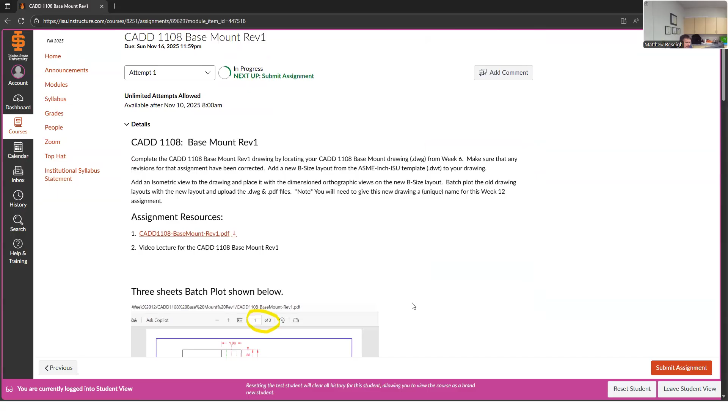Base mount, you've already drawn the base mount, but it goes back to week 6. So I'm going to open this real quick and just preview this, give yourself a little time to find this stuff. So base mount Rev 1 is going to be a revision from this base mount drawing that looks like this. This drawing was an assignment from week 6 that I gave you the model and you guys dimensioned it. Then we went over it, and I probably graded this already and gave you back the feedback. Some people fixed their drawings pretty quickly and re-uploaded them after we went over the key. The key's posted for it.

So essentially what it requires on your end is to get back in this drawing and make sure that it's correct. And it would look like this. It could look a number of different ways. You would really want to go back to your week 6 feedback for this base mount drawing and open it back up and make sure that you've made the corrections, or just review the revisions that I gave you, because you're going to use it as your base for this. What we're going to do is add the isometric view of this.

So not only are we adding the isometric view, but we're also adding the new template that is the ISU template. Because when we drew this, we were on our own title block template. We're going to bring your drawing into the ISU template, which doesn't mean you have to redraw this whatsoever. I mean, if you've lost it, yes, you're going to have to redraw it. It's not a crazy complicated one, but if you have it, it would be best to work with what you have and bring it in.

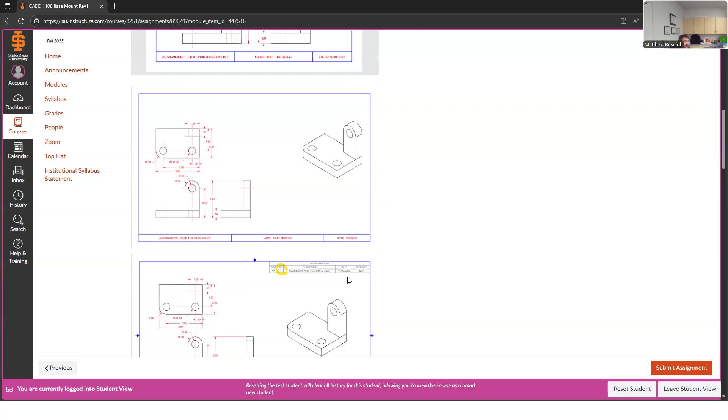So in order to get ready for tomorrow, I would want you to find this assignment and at least take care of the red lines for the dimensioning and then have it saved and ready to go. I'm just gonna show you a few little things on how to bring the ISU template into that drawing, put everything on the ISU title block page, draw the isometric view of it, and then put that in the drawing as well. And then I'm going to do a batch plot, which is just when you have multiple sheets in a drawing.

We haven't done this much, maybe, and the architectural students may have done this a lot because a lot of their drawings were just batch plotted PDFs, I'm thinking. But if you have multiple drawing sheets, how to print them off so they're in one PDF is what we'd want to do. So this assignment incorporates drawing a 3D-looking object in 2D. It also has doing a revision from one drawing to the next, to bring it up to date. And then it has an element of knowing how to do batch plots on the printing.

So it's a little bit of a technical aspect and drawing aspect, but maybe just what I feel like is it's a little bit of drawing management and then actually doing some of the new drawing. So we'll probably start this second half of class tomorrow. So in the meantime, find this thing. It's from week 6 for sure.

My files are organized by weeks. You choose to organize however you want. But in my course, I have mine all organized by week. So if I went to week 6, knowing that's a week 6, it's this base mount is where I have mine. And then my ortho key, this is what yours should end up looking like once it was done. And so this is the drawing you'd want to find, which has where I drew this.

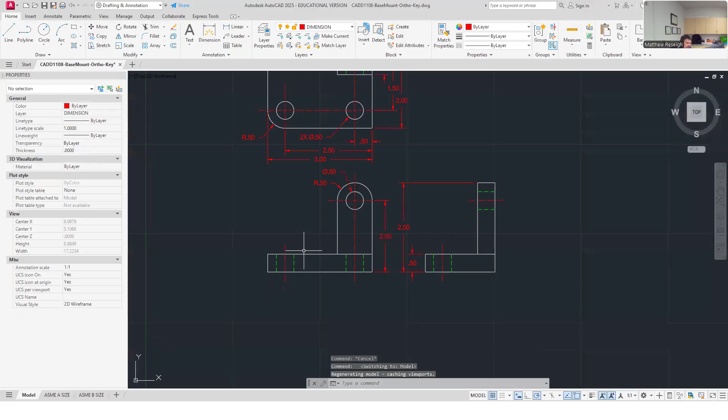And really, it was a drawing that you downloaded from Canvas because you added the dimensions to it, and then you re-uploaded it. So obviously the original drawing still lives in the week 6 assignment. You could pull it, it's just not dimensioned, and then you could dimension it. So there's ways to get back to square one by tomorrow, but this is where you'd want to be because I'm just going to go in here and add the isometric to it.

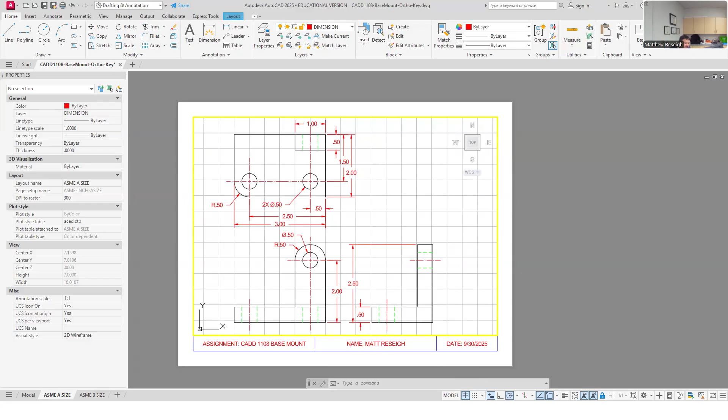And then mine, probably like yours, my template had both sheets. I think when I did the assignment, I turned it in probably on an A size sheet because it looks like I've strategically placed this thing to fit on an A size sheet at a 1-to-1 scale. I have the B size sheet, but I don't think I used it. I put it in the layout, but it's also at a 1-to-1 scale.

But we're going to bring in, yeah, I'll show you tomorrow how to bring that in and bring in the new template just from this file. I'll probably save it as a new file. It'll become a Rev 1 of this drawing. So we're just going to try to bring it in and finish this drawing. So that's my plan for tomorrow.

So look for that thing or redraw it if you have to, but I hope you don't have to redraw it. Okay. Because that's a matter of you keeping track of your own files, which is super important. So this is a lesson in that. If you have to redraw it, it's a lesson in I should keep track of my files better. So I have it.

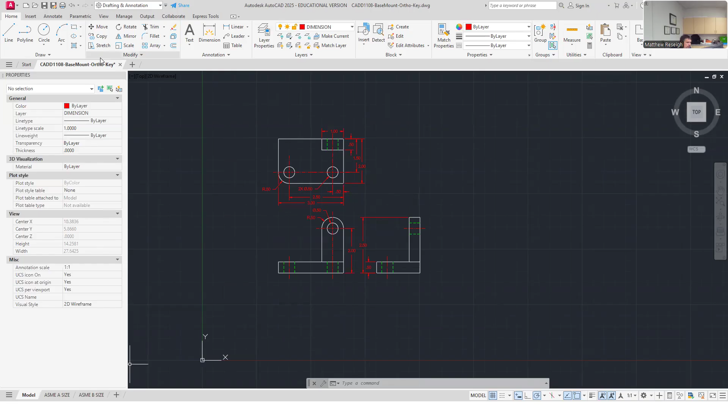Okay. And then you should have made the revisions to this. If you didn't dimension it quite right, and then I gave you feedback, you could pull up that feedback, or you could look at the key and get it dimensioned. Just notice maybe what you did differently than I did. Make sure things are sized and located right. Okay. So moving on from there, that'll be tomorrow. That's a preview of tomorrow. No charge.

Today, let's do this other assignment. So let me put that back out. The other two that we'll do this week, they're brand new drawings. So this is the only one that we have a revision going on this week, which I like. I'd like to do more of that kind of work, but I only have this one that I've modified to be that way. So right now we're going to jump into worksheet and Fastener Group 2, and I'll do it the same way I did Group 1. I'll work the worksheet and the drawing simultaneously. So I'm kind of working on both these assignments at the same time.

So the worksheet should just be a Word doc, probably a download. There's the doc there to download. So I'm going to open up mine. I should have a blank slate, that is, that's the key. I'm going to move that over here. Let's do the other one, this one. So worksheet 2 should look like this for Fastener Group 2.

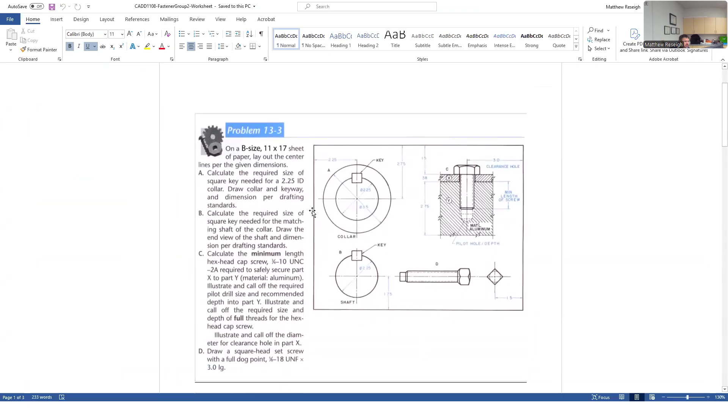Really, it's a key way. We're doing pretty simplified views in this, but there are kind of 4 different objects going on here, but I call it almost 3 different ones. We've got a hub, they call it a collar here, and a shaft. So this is kind of a hole and shaft relationship going on. And so there's some tolerancing that's going to go on here. So it has A is going to be,

yeah, let me read this. Calculate the required size of the square key needed for a 2¼ inch ID collar. So we have a 2¼ inch ID collar, or we'd call it a hub, maybe. I think in the appendix we need to solve for this, they might call it a hub.

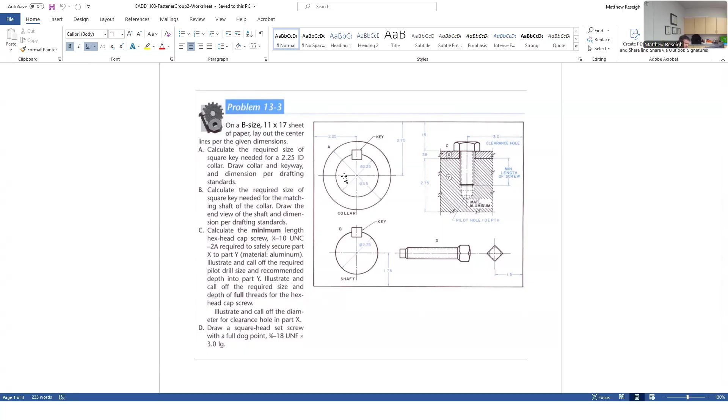Essentially, it's the hole for the shaft to fit into. And then we need to ASME standard dimension that. So we've got to kind of revisit that. We've done that one other time at least, maybe ratchet plate a couple times. Geneva Cam had some ASME. There was kind of the hub. And we dimensioned that key, the keyway in the hub, a pretty particular way for ASME standard.

We'll do that again. And then we need the other side of that, which is the shaft itself going into this hub, and calculate the required size of the square key needed to match the shaft for the collar or the hub. And we're just drawing simple front views of those.

We're not going to draw a right, even though we have no depth. We don't know how long the shaft is. We don't know how long the hub or collar is. That's okay. We're just going to do them as front views and how they fit together and the tolerances that would be associated with those in order to make them fit together. So that's kind of A and B. I consider that just one thing. They work together. So we'll do that one probably first.

Then C, we're going to have to do this where we take our fastener and we actually put it to work. So last week we just drew fasteners that weren't doing anything. We just drew the fasteners themselves. Here's one that's going to be in some work. It looks like we've got some aluminum we're going into, an X and a Y plate. So two different plates. Like I'm using this fastener likely to hold plate X in position in relation to this base Y, or whatever this is here. So we're going to do this ourselves here.

This is kind of the simplified view. The trick here is just thinking about how a fastener fits into a hole. This isn't a through hole. This is what we'd call a blind hole, meaning that in this particular part, maybe those threads had to be cut to accept our fastener. So internal threads were cut into this Y part, and so we'll get to that one.

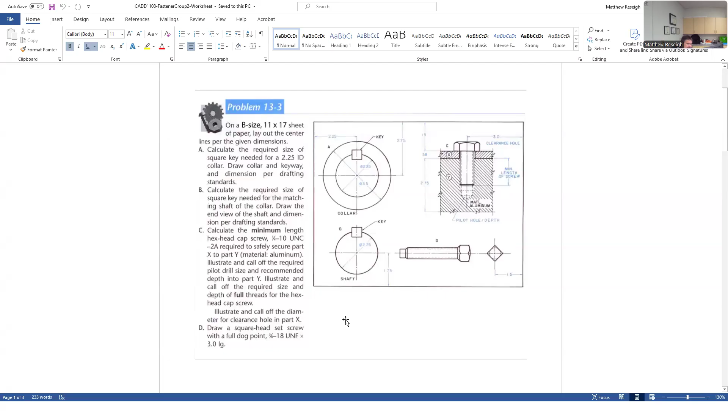And then we have this one that's just a little standalone. It could have been thrown on the other ones, but it's not. A little standalone set screw fastener. And so we'll talk about what that does and why it is the way it is when we get to that one. So I view this as kind of just three different things. I know there's four different things we're drawing, but okay.

And then they give us the local note for that set screw, a square head set screw with a full dog point, and they give us our local note, so we'll know how to maybe dimension that. But it's got some similarities to how we did that hex head in a way. So yeah.

What? Oh, so here's my. This is my. Oh yeah, I think. Yeah, got it. Okay.

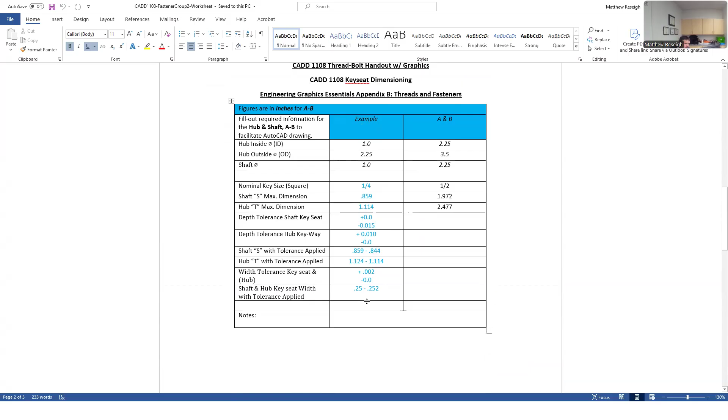So my worksheet starts with an example that's been done, and so I'll walk through the example and how to use the worksheet, and then we'll do that for our actual size one. So I think I preloaded the sizing from the A and B question here.

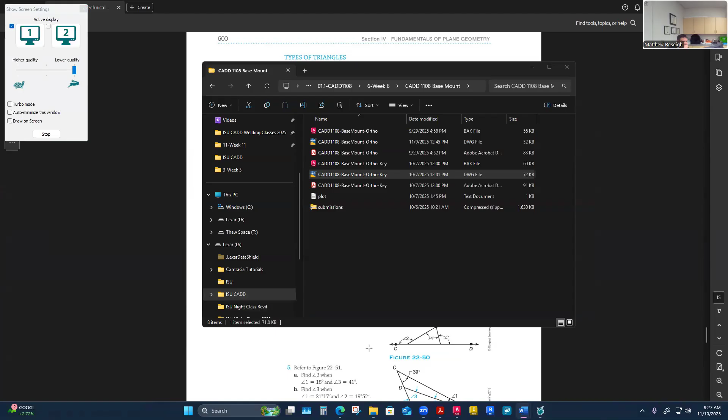I sure can. Let's do that. Thanks for asking. I forget that sometimes. And it's buried here somewhere, right there. Got it. Back up. Go back to my worksheet that's up here, right? I think it's this one.

Yeah, so what it says here is that in order to do this Fastener Group 2 worksheet, I need to find the thread bolt handout with graphics, okay? That one I pulled up, I don't think this one is critical to pull up, but we can look. It's in here. So this is the assignment.

We're gonna fill out this worksheet. Let me go back out to the main hub of the assignment for week 11 here. Remember, I loaded a bunch of resources into the resources for this week just because they kind of apply to different assignments. So let me open this up. These are going to be where I should find the handouts that it's directing me towards.

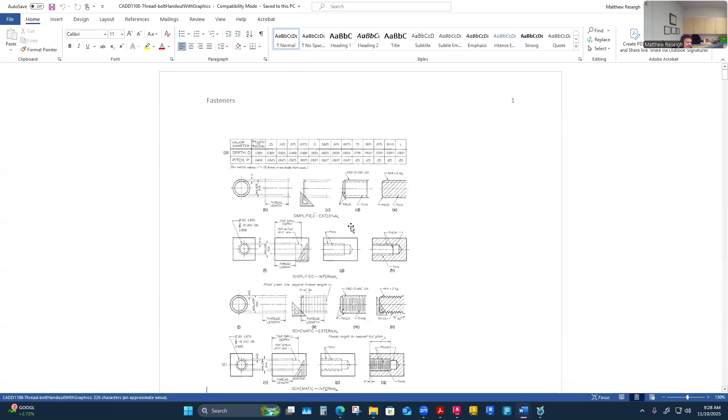So the first one it said is the thread bolt handouts. I'll open this up. I have my copy on my thumb drive here. Let me find it. Week 11. Thread bolt handouts with graphics. It looks like this. I don't think we need this too much for this particular one. These were some instructional sheets on how to draw this. So I know I allude that I need this.

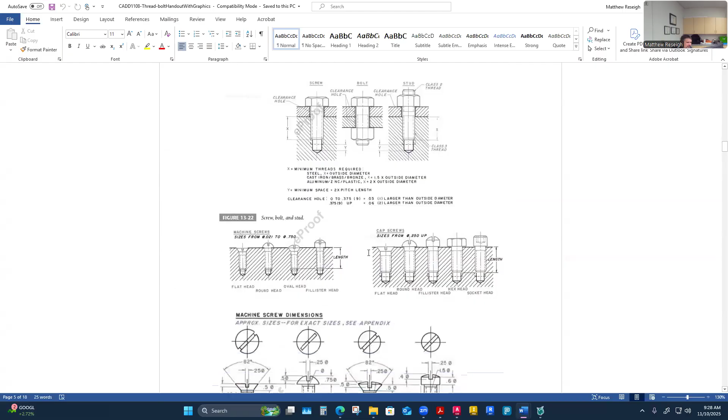But I probably need this when it comes closer to doing problem C of the group, and maybe the dog point a little bit is captured on here too. I think it probably is, but I think it's in Appendix B as well. So I think the necessary stuff that I need is probably pulled in onto Appendix B. So this one I may or may not need, even though it says the thread bolt handout with graphics. That's what I just pulled up. But I do need this one, key seat dimensioning, and the Appendix B.

So I think that I call this key seat dimensioning. Let me look in the resources tab. Key seat dimensioning handout. So we haven't used this last week. This will be the first time using this particular resource, this PDF. So I have it as my key seat dimensioning resource. This PDF, I'll open it up. It looks like this. First page is just a bunch of instructions. It's actually the instructions on how I filled out my example on that worksheet. I'm following these instructional sheets.

So how to obtain the proper dimensions for a key seat. What we're actually referencing when we do this is the Machinery's Handbook. This is the machinist Bible. That is this huge, thick thing that has a lot of stuff in it, machining related. There are some sections of it for key seats, shaft, and keyway combinations. So even if we had called out what's going on here on our print, the machinist is probably going to go and double check your work as a drafter and as an engineer ahead of you. The machinist is probably going to go back and make sure that the print that you're providing them makes sense to their own

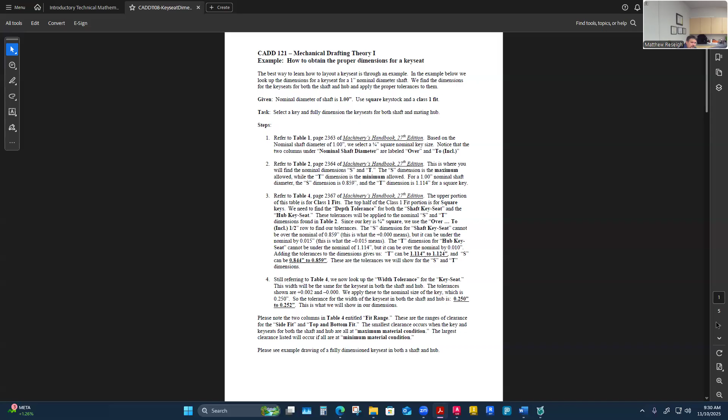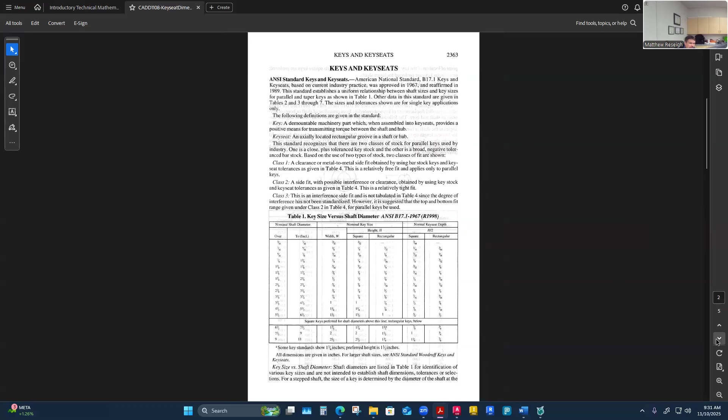Machinery's Handbook. And I don't know when the 27th edition came out, but that's what this is saying. We have some excerpts from it. So if I scroll down to the next page, page 2, these are excerpts from this Bible. And I do think this is page number. So this would be on page 2363. So it's a fairly all inclusive volume of mechanical stuff. 2364. Yeah, so we're pretty deep into the Machinery's Handbook. It is a thick volume of information. So these are just some particular ones that have been pulled out for keys and key seats.

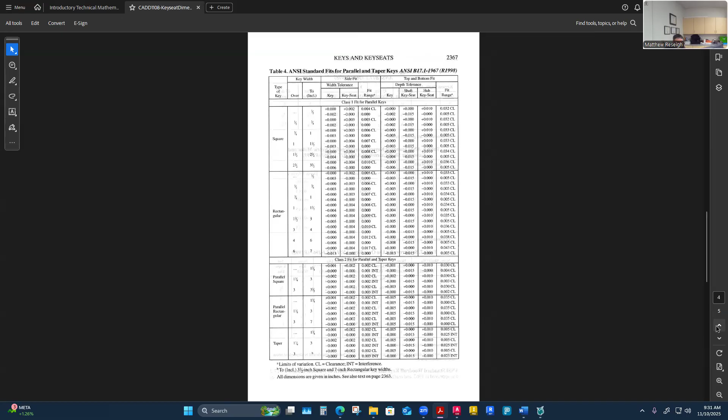So this is like a little bit of a research project, and then we're gonna end up with a drawing that somewhat looks like this, only I'm gonna put it on my ISU template. So it's not gonna look like this anymore. I think this last page was maybe how it used to finish off, but we're gonna bring it into the ISU template. I will come back and check to make sure I dimension mine the same way, but I'm not going to use this as my go-to dimensioning yet. I don't know if I've posted imagery for this yet. I should look.

So what I've got open is my key seat dimensioning handout. I don't really think I'm going to need to use the thread terms handouts, but I do have it open in case. And I'll need Appendix B when I get to some other stuff, but not for these first couple, especially for the first hub and shaft that I'm going to do. So I'm going to bounce back out to the main page. I've got the worksheet up. I've got to look through it and understand how to use it, but I'm going to go to the drawing, and let's see what I posted up for the drawing here. I thought I posted some imagery of what it looks like. So we're going to use our ASME inch template.

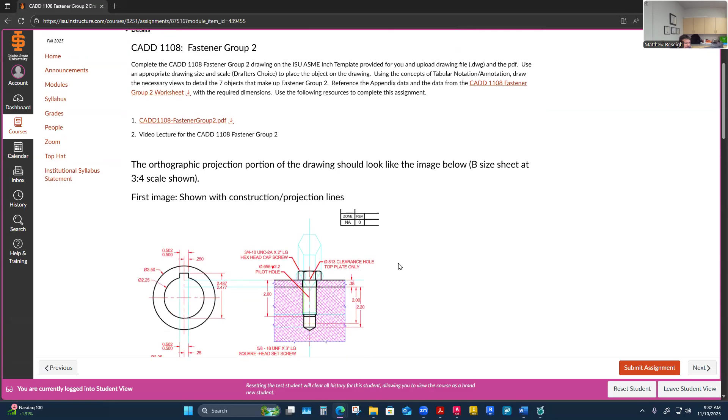We'll figure out which scale, which sheet it fits on the best. We'll probably tabular notate this potentially, or I'd say use the concepts of tabular annotation, which is how I built a table for worksheet or group 1. I don't think I built a table for this one though, so this is maybe a little misleading. I don't have to do it tabular. I do mine as more of a local note scenario here. So I didn't build a table. I use local notes to call out the fasteners, their thread notes, and so this is also a simplified way.

A table's great when I have a lot going on and I have a lot of different fasteners, and maybe they're always better captured in a table. This is a case where I just have a couple of fasteners, and so the direction I'm headed for my drawing is to fit them all on one. They don't all have to fit in the same viewport, so I can do different viewports of them, but I'm going to try to fit them all, and they don't have to be arranged this way on my drawing either. However I can fit them is going to be great.

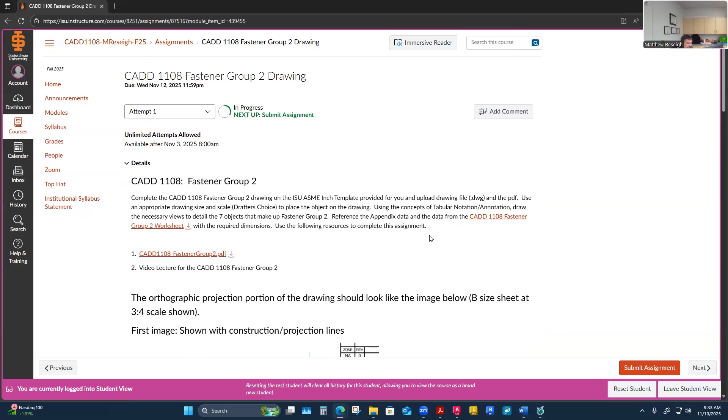Probably a B size sheet will be the most beneficial. So I'll probably draw them with enough. I can't remember if I had them in one viewport or not, but this is kind of where we're headed. So, it doesn't really tell me, just that I'm going to have to use that Fastener Group 2 worksheet and have it filled out to even be able to draw. So let's start filling that thing out. Okay.

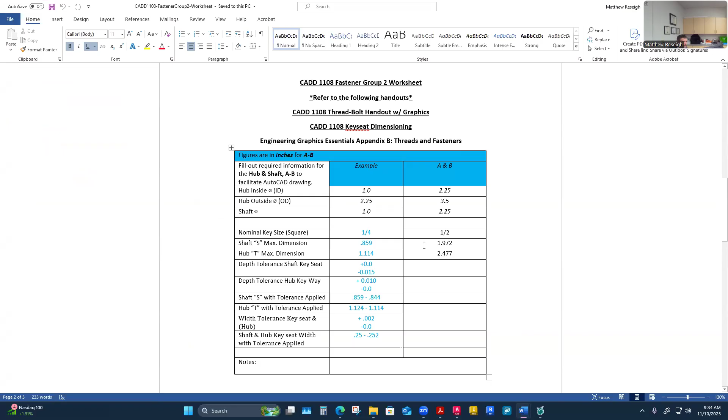Love these worksheets. Love them. Let's just look through how I got the answers for example 1. And so I might split screen this with my handout, which is this one: the machinery keyway dimensioning PDF. So I'll just kind of look over this with you here a little bit. They just use a 1-inch nominal diameter shaft. So the first thing they say is we're just going to do an example with a 1-inch nominal diameter shaft. So that's why I've put the hub inside ID as 1 inch here.

We're going to find the dimensions for the key seats for both the shaft and the hub, like a keyway or a key seat. The key seat might be the correct term for the one in the shaft. It's like the seat. You might make a little area of the shaft to accept a key. The keyway is, I think, the more correct term for the hub, or what they call the collar. So that's a keyway and a key seat, but they're kind of interchangeable. I think of keyway as being both of them, but technically in the shaft, it's a key seat. Okay. 1 inch is given. Use a square key stock and a class one fit.

Okay. So we've talked about different classifications. This is alluding to there being different classifications for the way keyways and key seats fit together with their keys. Because it really is a three-part combination going on. Not only do we have the keyway and the key seat, but we also have the key itself that's going to fit in and lock these three pieces together. So in the finished drawing, I don't draw the key itself though, right? I just have the key seat and I have the keyway, but I really am not drawing the key, but it would be the third component to this whole assembly.

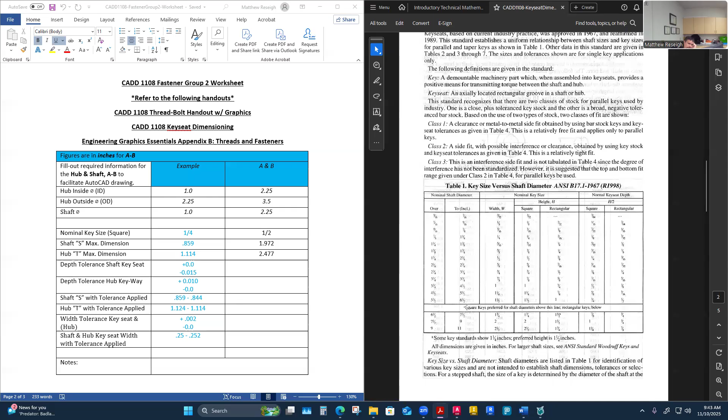So let's look at table two. Table two looks like this. Key and key seats. And I think this is just leftover literature from this page here. Key size, shaft diameters. They've got a lot of instructions here. It's probably good information. I'm just going to look at pictures here. Go down to table two. Here it shows me S. Okay, S is kind of the seat depth, and it's likely a dimension that ASME likes; they like their key seats dimensioned that way. Let me double check that real quick on my example here.

Snap back out to my little cheat sheet here. Let's see, yeah, see, I've used an S dimension there. It's this key seat dimension. ASME likes this. Mine's toleranced because there probably is a variance that this can be. And I think the T dimension is this one. And ASME likes us to dimension our keyways this way. So let's go back to this.

So S and T are going to end up being finished dimensions for sure on my drawing. It's driven also by the nominal shaft diameter. So in the example, it's 1. And then of course it's breaking down columns of whether these are square or rectangular keys and whether I'm talking about shafts, hubs, or tapered hubs.

So I believe ours is a parallel hub. That just means that the hole through, because I have no depth given on my example. If it's a taper hub, there would be some tapering to that depth actually, and it would fall into kind of a different category for sure on the hub. It would definitely impact that.

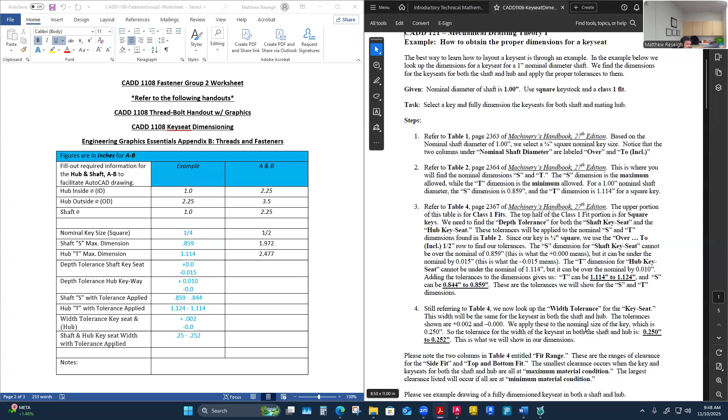And I'll be able to get a range of what my S and T dimensions can be, and that'll allow me to build a dimension style when I go to dimension that'll cover that. So let's see how we do that. Let's go back here. I think we're only on step 3, right? And then step 4, we might come back. Yeah, so let's go to step 3, table 4. You guys love these sheets, I know. Hopefully there's a table 4.

Right there. Table 4. So it's really driven by that leftmost column, which is the type of key. Ours is square. And like they said, they've got 2 different tables. They kind of split them here. One is for a class 1 fit, and these other ones are class 2 fits, which are really a tighter tolerance, almost on the verge of interference type fits.

So we're looking for a class 1 fit, square. And this is the key width though. So I have to know my key width. I'm not driven by shaft. Don't go to the 1 inch here. Go to 1/4 inch. So I've got to find the range where my key fits here, right? So this is key width. This is over to including 1/2 inch. This would be over 1/2 inch key, including 3/4 key.

So mine actually fits on the first row. They almost start with like 0 to 1/2 inch is essentially what's going on here, but mine is a 1/4 inch. It fits in this row. So what I'm going to look at is what these class of fits are. We've got a side fit or a top and bottom fit. I can't remember what it said on ours here, but we've got key seat, fit range.

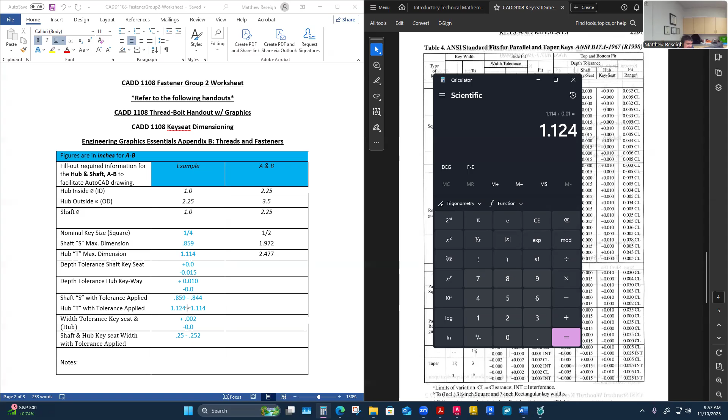So this is how I'm going to build my dimension for my actual. So when I see these, it's like, well, what are these? Well, these are actually the dimensions here. If I look at this little cheat sheet here, that's how I was able to come up with these dimensions, applying those tolerances essentially. Okay, we'll get to that point though. We just got to keep filling out our worksheet here and do our own row.

Great. So then the tolerance on key seat hub. Width tolerance. So the width tolerance is back to this row here on our 1/4 inch key. It says the width tolerance for the key or for the hub, which is not real clear here, because I call it the key seat. Oh, I do call it key seat. Okay, great. The key seat in the hub is going to be this particular tolerance set, plus 2 thousandths, minus none.

If I apply that shaft and hub key seat width tolerance, it's a 1/4 inch, and I can add 2 thousandths to that. So it can be 1/4 inch to 0.252 for the shaft and hub key seat. Okay. That's confusing. Let's see if we can do it ourselves for our actual dimensions given. We just start with step 1 and the table 1 stuff, then step 2, table 2, and then step 3 would be table 4.

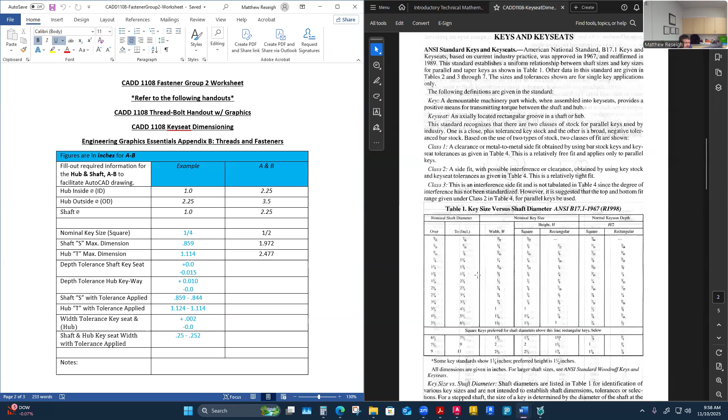Yes, I guess finishing the last 2 here is still referring to table 4. We now look up the width tolerance for the key seat. This width will be the same for the key seat in both the shaft and hub. That's why there's only one. It kind of applies to both shaft and hub on the width. And that's how we got those dimensions, was following that one particular column. Might be confusing on why we followed that one. We'll get to it.

Let's try to do one from scratch here. Okay. It looks like when I uploaded this, I didn't realize that I've already given you guys some answers. Probably, yeah, I already gave you guys half the answer. Half of it I've already done for you.

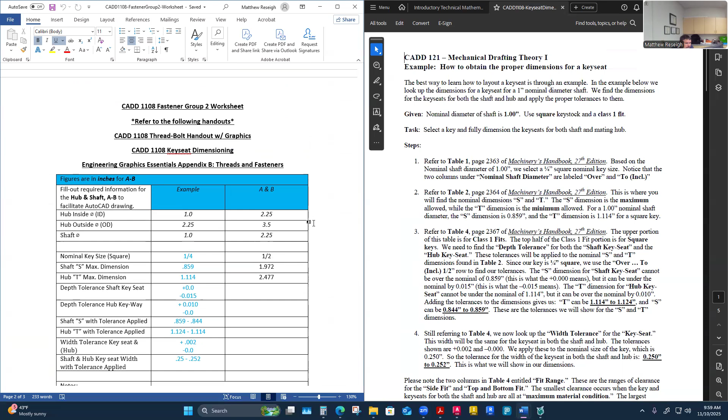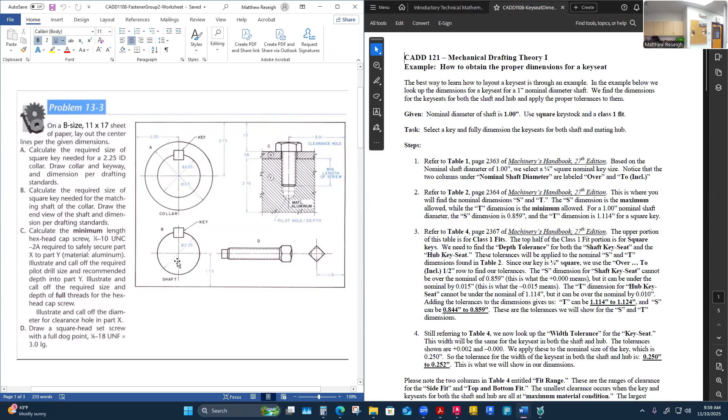That's good. So if I go to my example now, which is from the beginning here: calculate the required size for the square key needed for a 2 1/4 inch ID collar or hub. And then we're going to draw those, and then calculate the required size for the square key needed to match for the actual key seat here. So essentially, I'm working both these in A and B column here. So it's a 2 1/4 inch hub, or the shaft is going to be 2 1/4 inch. They're going to match as their nominal size, that is.

Okay. So I'm going to go down to my table one, and like I said, I've already done the first few answers. I'm going to double check my work here and make sure I did it right. So it says I need a half-inch key. Let's just make sure that's correct. And I should have deleted these, so you had to do it. But 2.25 is the shaft diameter. So this table one is driven by shaft diameter first.

So I need to find where 2.25 fits on here. That's 2 1/4. So 2 1/4 to 2 3/4. That's a row that might work. The only problem is 2 1/4 to 2 3/4 means that I have to be over 2 1/4 inch on my shaft size, and I'm not. My nominal size for my shaft is 2 1/4. So I'm not going to use this row. This has to be over 2 1/4. I'm going to use this row. This is including up to and including 2 1/4.

So this is my row to determine what my key size is for my square key, which is a half-inch. It's given right here. So that's how I've pulled the first data in. It's got a half-inch key. Great. And then what's the shaft S max dimension and the hub T max? All right, let's look at table two. I'm still driven by the shaft diameter here on this table. For a square, I'm looking for the S, which is the shaft max dimension it can be.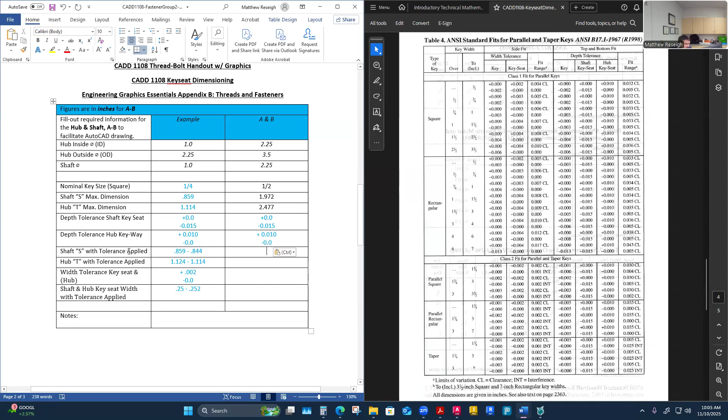It's plus 10 thousandths minus none. So it ends up being the same as the quarter-inch key. So I'm going to copy that and paste it over here. Perfect. And then I just got to apply. These will be different numbers, of course, because my nominal sizes are different. So now what I'm going to look at is the shaft S with the tolerance applied. So here is shaft S. I'm going to pull up my calculator here. This is just calculator work.

So the shaft, this depth that I'll allow it to vary is going to be minus none. Oh, sorry, plus none and minus 15 thousandths. So shaft S, let me clear this out and do my nominal size on my shaft, 1.972. And I just need to apply these tolerances. So really it says the shaft can be no bigger than this. So I'll start with that dimension there. If I apply the tolerance, that's plus none, so it's still going to say 1.972.

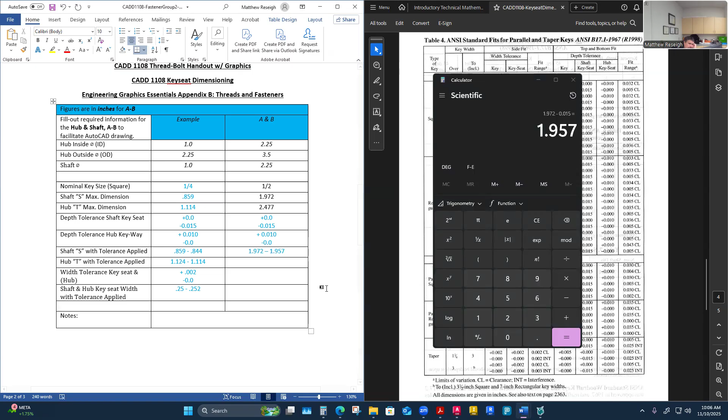And the range is going to be, this isn't a subtraction, this is a range. 1.972 to 15 thousandths under, right? So I'm going to take 1.972 and subtract 15 thousandths from it. This is going to give me a range for the shaft S, or the depth: 1.957 is my range for my shaft. What helps me think of that is this picture here. This is the shaft. That means the S dimension can't be any bigger.

I'm going to zoom in on this because I feel like this makes sense. If I'm going to put a key in here, the only dimension I've dealt with here is this depth dimension. I haven't even talked about the width yet, just the depth. So this S dimension in a shaft, this tolerance is telling me it cannot be any bigger than what's given, but it can be less than that, 15 thousandths, because I want to make room for the key. I wouldn't want it to be any bigger than that.

Otherwise, the key won't fit and the hub key shaft relationship will not fit. So I'm actually saying it can never be bigger than 1.972, but it could be smaller, which means this dimension would be 15 thousandths less.

And so really it would be cutting a deeper seat in, this is what it would be. I mean, it's kind of weird thinking. To me, it helps to look at that picture and be like, what is this? What does this tolerance even mean? It means that I have to make room for that key.

This dimension can never be bigger than 1.972, but it can be less than that by 15 thousandths. So my key will fit in there good. It'd be like cutting a deeper groove, deeper key seat in that shaft is what's going on there. Okay, cool. We'll look at the same thing with the hub, because the next thing is the hub with the tolerance applied. And so here's the hub nominal, 2.477.

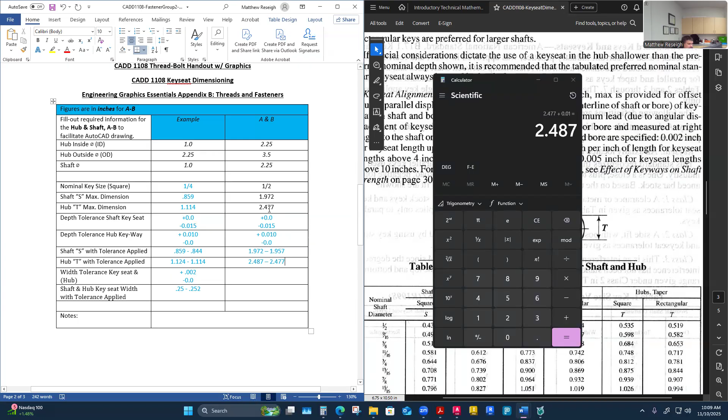Now, if I look at this picture to help me better understand that, and I look at this tolerance, it says that this T dimension can be bigger by 10 thousandths, which is me cutting a bigger keyway by 10 thousandths. But it can be no less than that. Otherwise, a half-inch key will not slide in.

So essentially, if I hit my S in its maximum material condition, and I hit my T at its maximum material condition, that'll be the tightest fit for that key. It'll almost be like size on size, like a half-inch can barely fit in there. It would still fit, but it might be kind of hard to get the key in there. It's going to be better if my machinist cuts this to allow some of that tolerance; they will know that it will fit in there better.

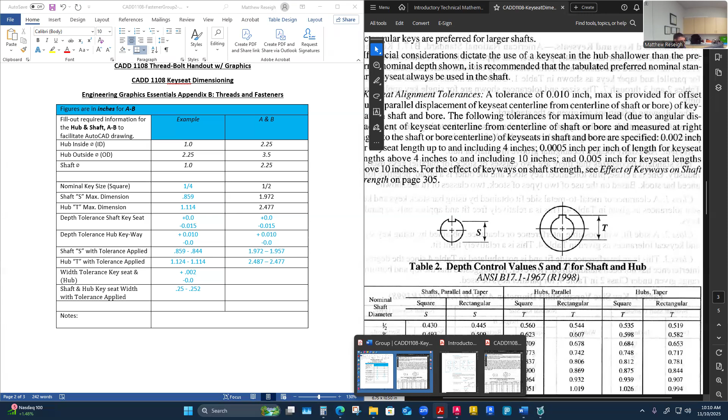So yeah, hopefully that makes sense. It's always confusing. Some people have had some experience with this stuff and it makes sense. Some people are like, what are we talking about? I get it. Be patient with yourself. We're about there with the dimensions we need, but we've only really talked about the depth. S and T are just the depths. On our chart, we've only been talking about that top and bottom fit, that depth. So really we need to calculate the width element.

The key has a width as well. It's a half-inch key, square, half-inch wide by half-inch high. So the width tolerance, this is for the key itself, this is for the key seat. I can apply this to the keyway and the key seat as one, because they don't really break that difference up. They call them both key seats. So for the width, they don't make two different columns for the shaft or the hub, just the key seat width, applying to both the shaft and the hub.

And this other column is the key itself. We're not even drawing the key, so we don't really have to worry about this, but we need to pick up the key seat and the keyway tolerance, and they're both combined there. So my next column here is the width tolerance key seat. I could say the width tolerance key seat and keyway, or I could say both.

Because this is the key seat width. It's the same for both, but it's that plus 2 thousandths and minus that. So that just means copy this over here. It's the same for the 1/4-inch key and the 1/2-inch key. That's something that's not shown here, but if they did, it would be like another variable. They're showing the width here.

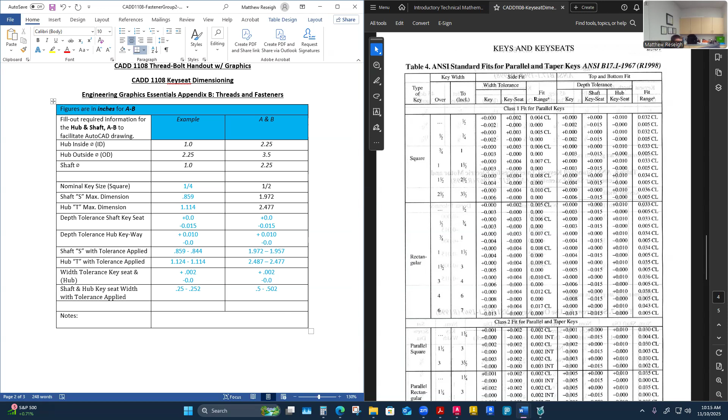So I'm going to make them 0.25, and they can't be any undersize. It's not 0.25, sorry, it's 0.5. Our key has to fit into a slot that's 0.5 because our key is 1/2-inch wide. So our key seat and keyway have to at least be 0.5-inch, but they could be a little bit wider by 2 thousandths, which would look like 0.502. That's how I would get it. And then my half-inch key would fit in there pretty easily because it can be a little bit oversized.

Okay, we have the dimensions to draw. Let's draw. So I have CAD open. I gotta open a new inch template to start this thing from scratch. I'm gonna put all these on one. I know we're getting short on time a little bit. I'm gonna keep this as one video though. Try to at least do these drawings and call it a day, and then we'll finish the other two. I'm just gonna try to finish the hub and key drawing.

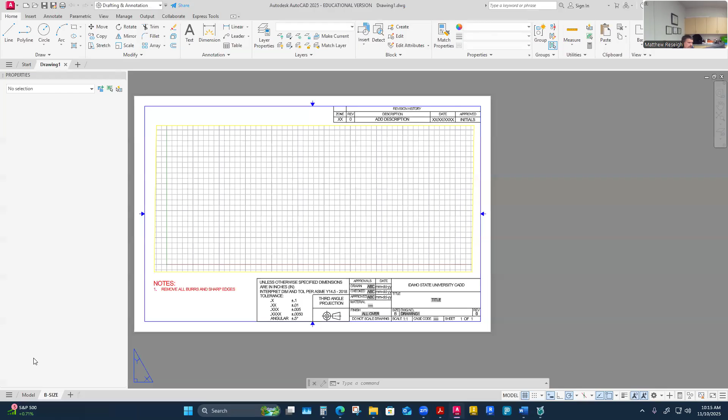So I'm gonna pull up my ISU inch template. Start from scratch right here. What I have to know is all this data from this worksheet. In order to draw this, first I can just draw the hub. I've given you a hub OD because you have to have a hub ID and OD. I think I just made this up. There's nothing talking about the hub OD here, so I gave that to you.

So the first thing I can do is just draw two circles, and I can draw shafts, and then we'll talk about cutting in the keyway and the key. So let's just draw those first. I'm gonna pull my worksheet over to the other page so I can see what I write.

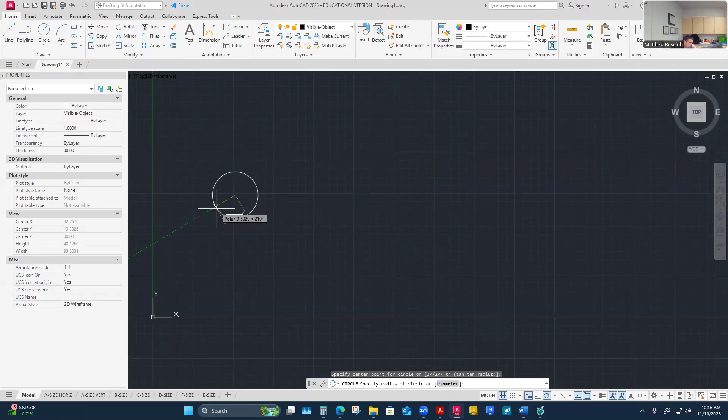So on my visible object layer, I'm gonna do a circle for the hub. I'll just draw it right here, anywhere. The hub OD is 3.5 inches. Oh, wait, I did it by diameter. So it's a 3.5 inch diameter. So if you draw it wrong and you have your properties panel up, I change mine right here, 3.5. Bam. That's a quick change.

I'm drawing the hub and key. So what I'm really drawing right now are these two drawings right here, because all the data I just pulled is for these two drawings. So I'll kind of draw them at the same time. I'm just doing their blank sizes. Then I gotta put in the dimension for the keyway and key seat here.

Yeah, exactly. So that's the outer diameter, and then the inner diameter. I'm pulling these from your chart. These are the first given dimensions right here. So the hub inside diameter is 2.25, so that's what I'm going to use here. If you want to do that by diameter, that's maybe easier in this case. Concentric to that, so 2.25.

So that's what my hub would look like, my collar. I don't know how deep it is, but that's what the shaft is going to slide into and be locked together with a key. So I'm going to have to cut a keyway in that.

Okay, that's great. I'll draw right here below it, orthographically aligned. Another circle with the diameter of the shaft; the shaft diameter matches the hub diameter, kind of nominal size. So I'm just going to target here and project down here and draw this in as 2.25. I could have copied that other one too, but I've got them orthographically aligned.

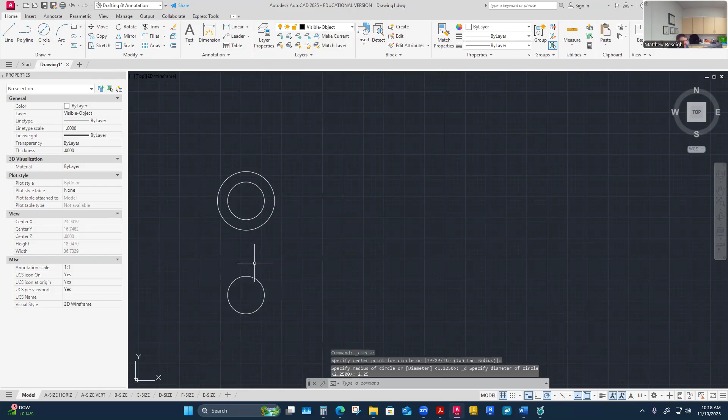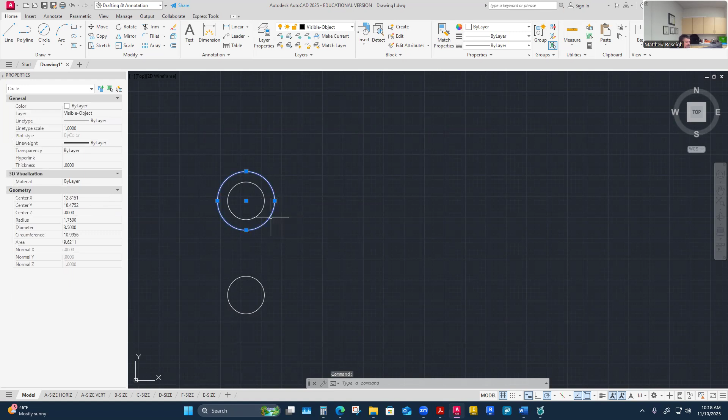That's fine. I haven't done any construction work, but I do have the centers lined up. No particular space apart, just enough. I'm gonna have to do some dimensions here, so if I have to move them, I could move them. 2.25 and 3.5 is what I put, just kind of random. At least I put it on the chart. It's of no particular significance, just something so I have something to draw.

And then I think I'm going to draw some center lines on this. I could use a center mark right off the bat to have something to work off of. So I might come in here and just put a center mark on these, because what we want to do is draw this in here. So if I'm going to draw this in, you're thinking, well, how do I draw that in?

Because technically, if I'm going to draw this keyway in here, I've got a variance that it can be, right? My chart is telling me that it can vary in size. So what do you pick to draw with? That's a question you've got to ask yourself. If I'm allowing that to vary, what do I use to draw? Technically, you can just draw with any of the sizes, and then you just have to tolerance it correctly.

So if you draw it to its small size, then you've got to make sure that you dimension it small to big. And if you draw it to the big size, then you've got to dimension it so that it can be smaller. So you just have to think of the tolerance. Sometimes I will just draw them to their nominal sizes.

And then the keyway and key hub, we think of it as being for a 1/2 inch key. We determine that it needs a 1/2 inch key for the size of shaft. That shaft diameter is driving that key size because it's a 2¼ inch shaft. It has to have a 1/2 inch key. So 1/2 inch is what I would consider the nominal size of the key.

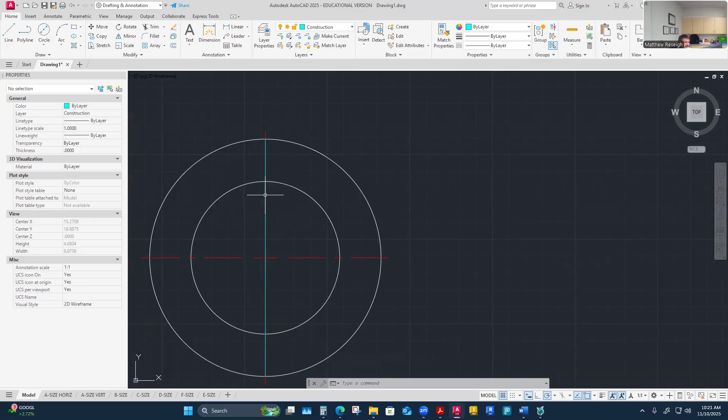This is through center, because I want to put in the keyway, maybe the width first. How wide is that? Well, it's a 1/2 inch key that's going to fit in here, so I can offset this line by 1/4 inch, and that'll be a 1/2 inch wide keyway. So I'm going to offset this construction line by 0.25. Then that's the nominal key width. It's a 1/2 inch width, right?

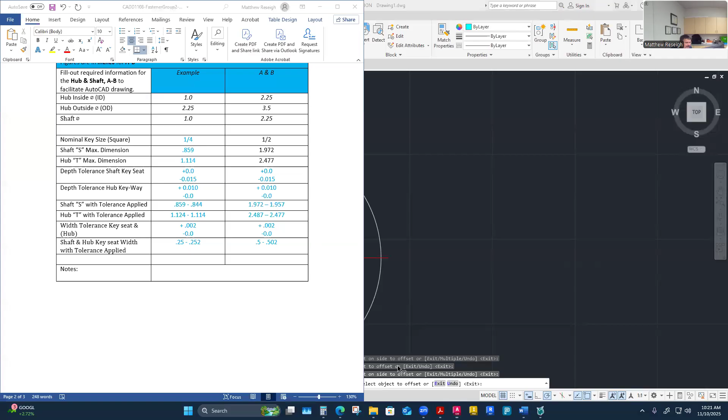And this is going to be chopped in here at some particular depth. So I know that at least. Interesting thing is, off my given data, I almost started with my dimensions off the bottom, but I put in the keyway width first, and it's going to be able to vary. Yes, I drew it 1/2 inch wide, but when I tolerance or dimension it, I'm going to say it could be down to this size as well.

So I'm going to allow this, or maybe even build a dimension style to tolerance this. But essentially, I'm drawing it at its nominal size. It can be oversized by 2 thousandths. But I've drawn it at 0.5. I've offset it.

So let's figure out what the depth can be. I've got this one drawn in. The depth is going to be this, I think they call it T. The T max dimension right here is 2.477. So I think I'm going to put this in as kind of a nominal size. This T max dimension is 2.477.

And then the tolerance I'm going to have to apply is this; it's going to have these dimensions that I will allow it to actually be. But I'm just going to put in the nominal size, 2.477. I just have to know where that's pulled from. This shows that the T size was from the bottom. So I could draw a line horizontal with the bottom of my inside diameter and then offset it by the T max dimension, 2.477.

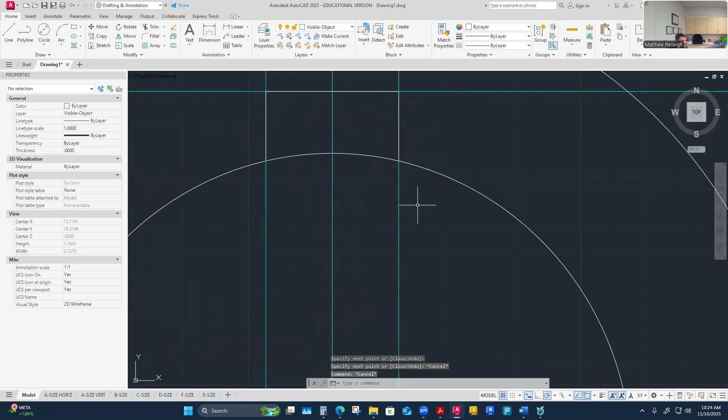So if I go over to my visible line work, I can trace that it'd be cut in here, cut to there, cut across, and then cut down. And then this would be trimmed out. So now I've just machined that out, and now I can accept a key into my keyway there.

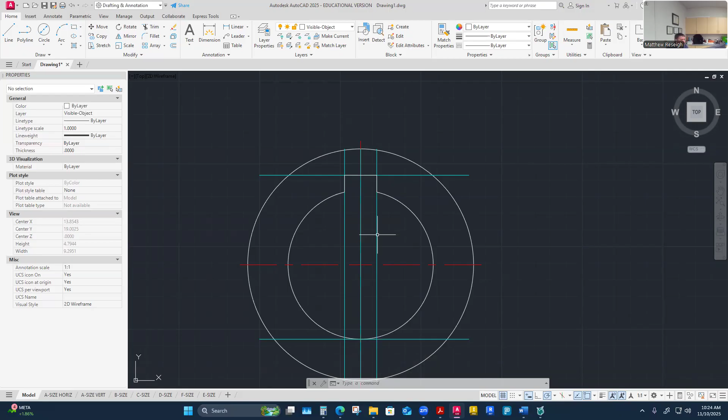I have to worry about the dimensioning and tolerancing once I actually apply dimensions. Right now, I just got it kind of modeled at a nominal size, right? So it's modeled at nominal. Now I need to do the modeling for the key seat in that.

And so it's the same width. By that Table 4 chart, the columns for the key seat are including the widths essentially. We're including both the hub and the shaft in one. So I can really do the same little construction work here. I'll probably draw a little construction line here. I'm going to offset that for the nominal key width, which is 0.25 if I'm offsetting for a 1/2 inch key. So there's my nominal key width for my key seat.

And now I need to know that S dimension, that S max, because ASME likes to dimension that from this point of tangency out here on the shaft to the depth of the key seat being cut into this. And so I'm probably going to draw another line like I did. It's going to be based off of this. And this is just kind of ASME. It makes it so you can draw this pretty easy, and I like that the ASME way I'm going to dimension this is how the Machinery's Handbook shows the machinist how to cut it, right?

The lines of communication are the same if I'm following an ASME standard way to notate and annotate a keyway and key seat. It's going to match that Machinery's Handbook that they're going to use to check my work. So there's this uniform system of me dimensioning this way, they are cutting that way. It's a good situation. So I need to find what that S dimension is though.

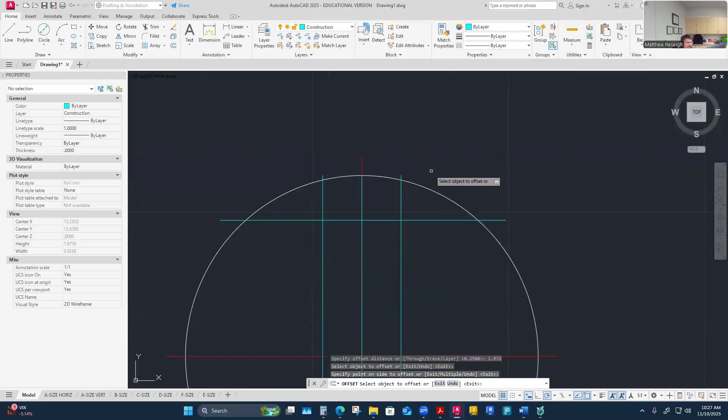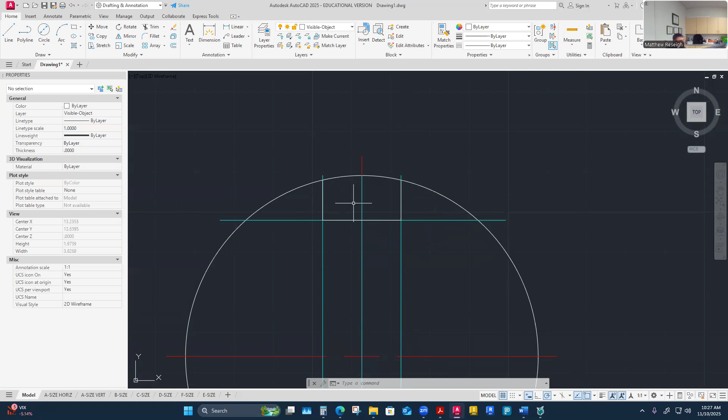Did I do 1.972 the right way? This way? What do you tell me? It's just the nominal size of the key. What is that? That's half of it. Nominal size of the key is 1/2 inch. So yes, I offset it by 0.25. That way I get a 1/2 inch. And then I've offset that by my S. Now I'm going to trim this out, and I'm ready to dimension this.

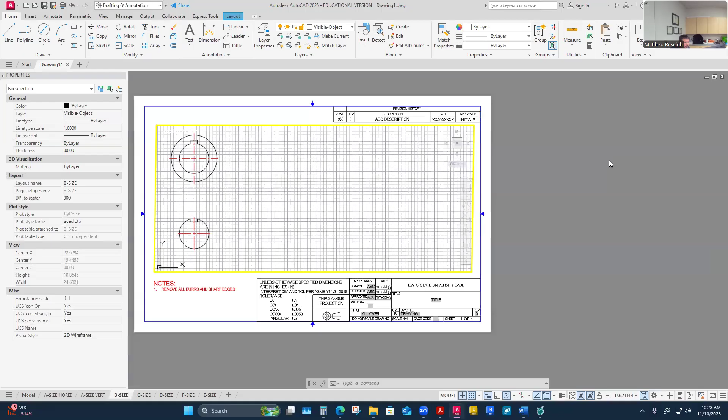I can actually put the... cool. So I'm gonna turn off my construction mode. I'm gonna go into my sheets. I'm gonna do this on these sections. I don't know if I finished this at a 1-to-1, probably not. It looks a little bit big for 1-to-1.

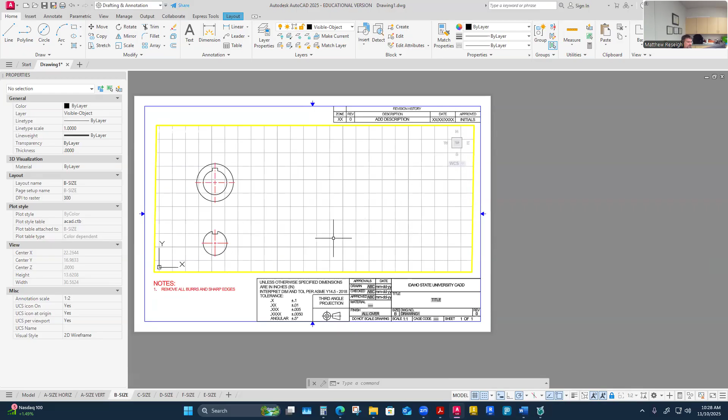Yeah, I could have fit them better if I wouldn't have done them top to bottom. True that. It's a half scale. This will be fine for right now. I won't totally set myself on a scale until I finish my other ones. Then I'll decide if I need multiple viewports and multiple scales, and I can apply those too. I'm at a half scale right now and it fits on my sheet, so I'll just lock it at a half scale for the moment. I just wanted something so I could start dimensioning.

So there's a couple things to dimension because I don't have a rectangular view. I'll dimension my nominal diameters here. So the first thing to start with will be some diameters. I'm gonna dimension this as a diameter, and that's just something that was given on my sheet. It's a 3.5 inch diameter outer bore hub. It's a nominal or basic size. I just know it's that diameter, so I'm not going to manipulate this dimension at all. And then, because I'm not doing a section view on here where I could give the inner bore size...

So I'm going to do another diameter for this inner bore like this. That is a nominal size. We may change, and maybe I'll put this one above. It doesn't really matter, but I'm just working with a little bit of staggering here. So even if I were to take a section view and pull that, I wouldn't get that dimension either, because of the keyway that's cut in it, I wouldn't be able to actually pull this dimension. So this is a great place to at least put the nominal size in.

In the future, we might start changing that dimension to like a basic dimension or something because it probably has some tolerances allowed to it. We didn't do any tolerancing for the actual shaft diameter or inner bore diameter, so it's just going to stay at 2.25. So I'll just leave that there.

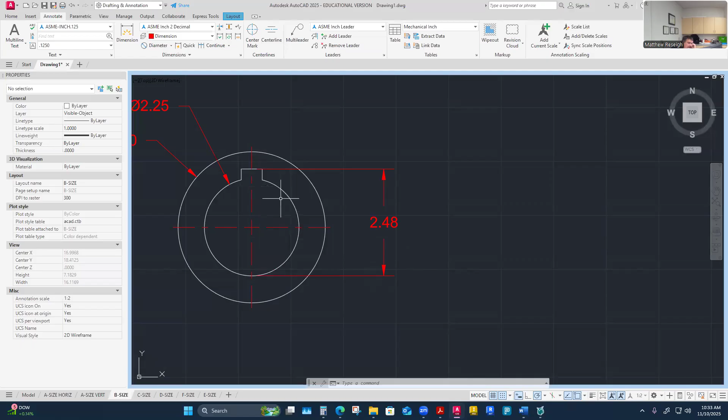So I've got to change that, but for sure ASME likes this. And of course I can pull this back to the object edge. Pull your extension lines back. It likes to know kind of this overall T dimension. And then it likes to know, and there is some sense in me to say that it's like the most correct to say that that's size.

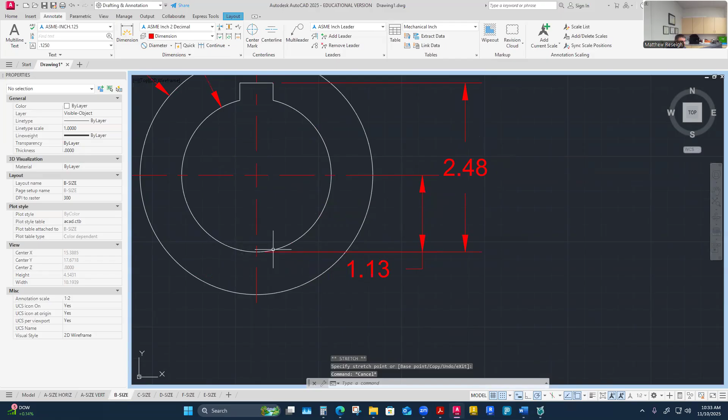And this is kind of locating, because if I think of that, always going back to that size and location relationship, yes, this is a size, but this is the location off the center line, right? And so I like this as a locating dimension for this size. So I size this, but yes, I'm locating from center to there, and then I'm kind of following this maze, right? This dimension is now based off kind of a center line, is how I view that.

And it's the same way when we get to this key width here too, right? Like we'll think, well, I want to know this size. This is the size of the keyway, right? So it's a 1/2 inch, but that's just kind of based off what? Well, I can locate it by saying it's based off this. It's like from center to center here, right? Is a location for that size.

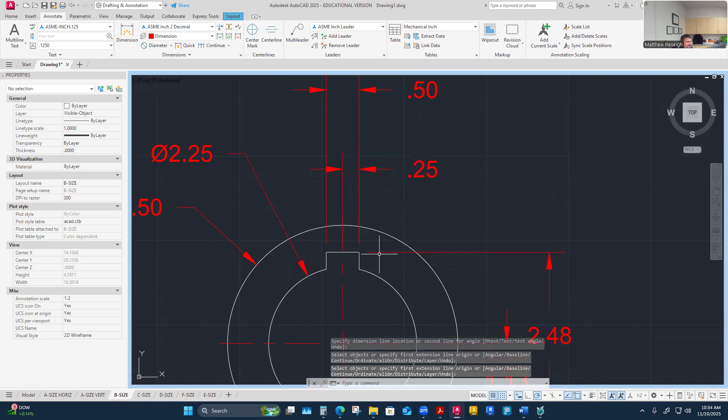This does the same thing. I'm locating off the vertical and horizontal center lines, quarter inch over, and then it's a half inch. So ASME likes this. This is kind of the way it would like us to dimension ours. But now we need to be a little more critical with our dimensions because we have a tolerance applied. So let's apply them and see now.

So I could build a dimension style, and it's three decimal places of that. So I could kind of build a dimension style with this tolerance already applied into it, because what we end up doing is we're gonna dimension this as a limit dimension. I have a couple ways to apply a dimension on my sheet. If I look at the way I did it in my example, I'll just zoom in on this. And you guys remember this from your dimension chapters.

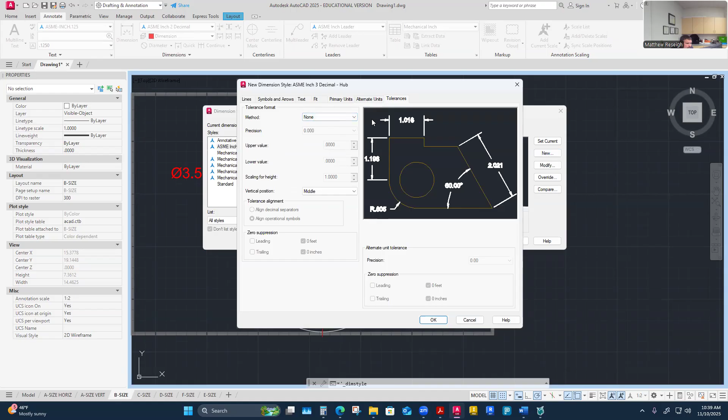So I don't think we've messed with this tab yet. So on the tolerance tab, what do I have? Oh, I can choose these, it's kind of interesting to see. Mine's a little bit blurry. If I make this bigger, maybe it clears it up. I don't know if it does or not. That's pretty neat. Their viewport shows this is a symmetrical tolerance,

which should be plus or minus with the same value. Symmetrical tolerance means my tolerances are the same in both directions, so it can go the same plus or the same minus. My tolerance is actually not that way, right? My hub tolerance was kind of like, yes, bigger, but none less. So it's not a symmetrical tolerance. So I'm not going to use this one.

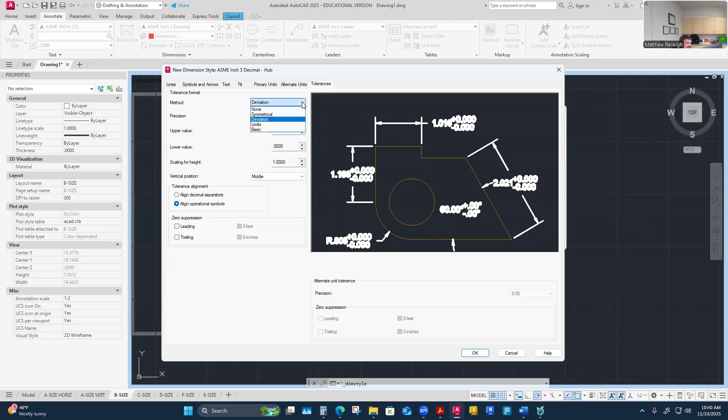Then we have a deviation, and mine could be displayed this way. I could have the nominal one displayed, and then apply the two tolerances, the plus and the minus, that are not the same, right? So this one would work for me, and this would be a legit way to dimension mine and include the tolerances. So that's called a deviation type in CAD. And then we have limits, which is what I'm going to do. I'm going to apply the tolerance through here, and it's going to display the limit type dimension. But I feel like this one or the deviation type are appropriate dimensioning.

And the last one is a basic. A basic is kind of what I could call my nominal, like the hub ID and the shaft OD. I could call those basic dimensions that should have a tolerance applied to them, which puts a box around them. So we call it a basic dimension, and that really gets specific when we get into GD&T land. I'm really careful to make sure the dimensions that are basic are boxed like this for GD&T. But for right now, we can be a little lazier and we're not talking too much about basic dimensions. So I'm going to make a limits type dimension style.

And what you have control over now is the upper, like the plus, and the minus. So if I look at my worksheet here, I'm going to build this particular dimension, and I want these to display for my hub. This is my hub allowed variation here. It can be plus 10 thousandths, but minus none. And so I feel like this is the upper deviation and this is the lower deviation.

And maybe that's confusing. If I get it wrong, it's just a matter of reversing the tolerance I'm applying. So when I apply this tolerance, I'll pay attention to the dimension and how it changes and see if I need to change my tolerances. If you pick wrong, it's all right, just pick the reverse. But I'm saying that my hub should be plus 10 thousandths and minus none. So if I go over to the upper value, I think I can go up 10 thousandths like that.

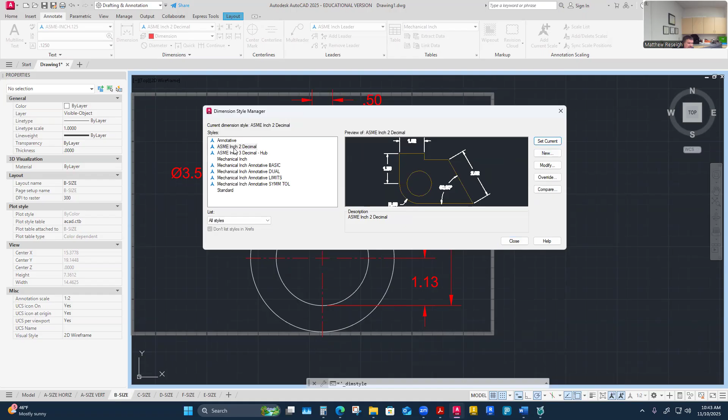I'm still going to keep this one as my set current. But what I've done is I've built that dimension style. It's in my list now. So I'm going to close this. So now, remember, you can just push this to a new one. I don't want it to affect my whole drawing. A lot of this is dimensioned correctly. It's just that this one is not displaying correctly. So if I single select it and right click, you can push this to a new dimension style, just like me locally pushing it.

Single selection. If you double click, obviously you're in there manually manipulating the dimension, and do not do that. Never manually manipulate the dimensions. That's a really easy habit to get into, but horrible for the next person to work with your drawings. They don't know that you manually changed the dimension. Oh my gosh, what a needle in a haystack to find that is. And then you want to punch whoever did it. So don't do that. If it doesn't display the right dimension, you have to fix your drawing.

Okay. So single selection, right click, dimension style, push it to 3, the one I just created, and decide if that's reading right. Then that means I put my tolerances in correct. How I would check that is it can be 487, but can't be any less than 477. So let's look here. 487 to 477. So I put my tolerances in correctly so that my limit dimension is displaying these dimensions. I've actually drawn it to the nominal value.

I won't get into detail too much here. We did good here. It was great to just draw with the nominal size, right? It kind of depends on if I have a symmetrical tolerance or a deviation type tolerance. Sometimes that impacts the size that I model to. If I have a symmetrical tolerance, I might try to draw to the middle of the tolerance, or I might still draw to the nominal size and have a deviation. But anyway, just be careful. The way you draw sometimes does impact how your tolerances will work and display. So I like this though.

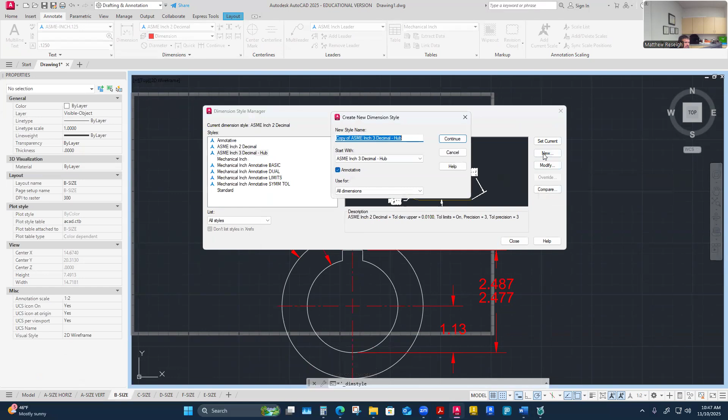I'm going to go back to my dimension styles. I'm going to start with this one, the one we just made. I'm going to do a new one. I just got to call it a different thing. It's not for the hub though for this one. This is actually a three decimal style, everything the same. I kind of want it, but I want it to be for the width.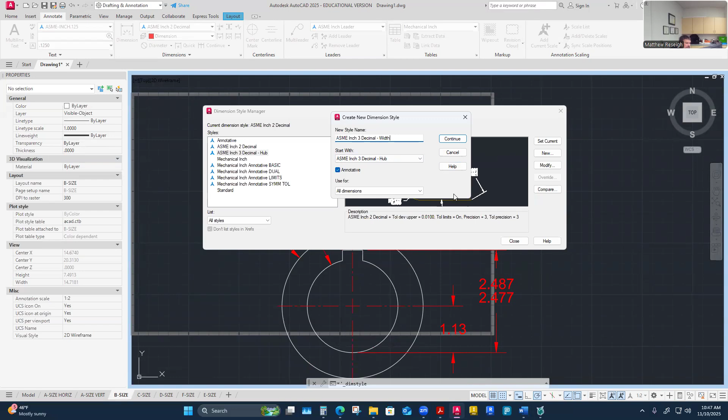It's not real clear. If I had like 40 different dimension styles, I might need to be a little more specific on that, like key width or something, like half-inch key width. But this will be fine for our level of drawing. Just something that I can pull out of the list. So I'm going to say, yeah, continue that.

It's pretty much all the same, except the tolerances are not 10 thousandths if I look at my chart here. So the tolerances aren't the same for the key width. They are only 2 thousandths. It can be plus 2 thousandths, but minus none. And so I'm going to go back here and say the upper value cannot be 10 thousandths. It has to be 2 thousandths to none. And I'm going to say, okay.

I'm going to still keep this one as my set current and close it, but I'm going to push this one now to that style with the width. And so it's a .502 to .500, and it's out to three decimal places. I'm keeping both of those to three decimal places because of that. This is inches, so I could drop the leading zero. I feel like one thing that's incorrect here is that for inches, I'd probably drop the leading zero.

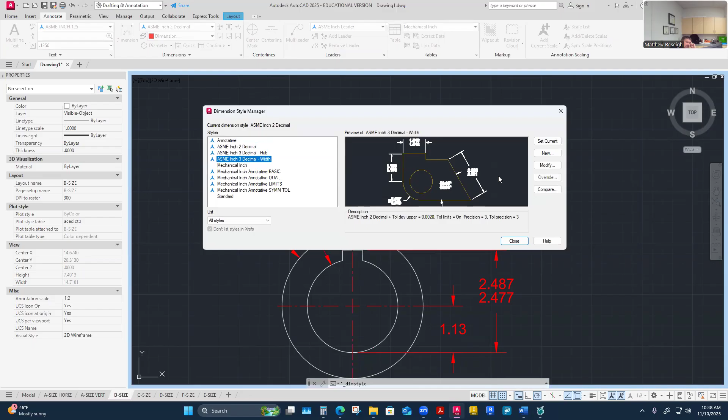So I'm going to go back in and modify that width dimension style. It's just because for ASME, we would drop the leading zero. So primary units is three decimal places. Leading zero suppression, it does say zero. Let me see why I'm still getting a zero there. It might be because it's separated. Yeah, so I need to suppress the leading zeros. Good call.

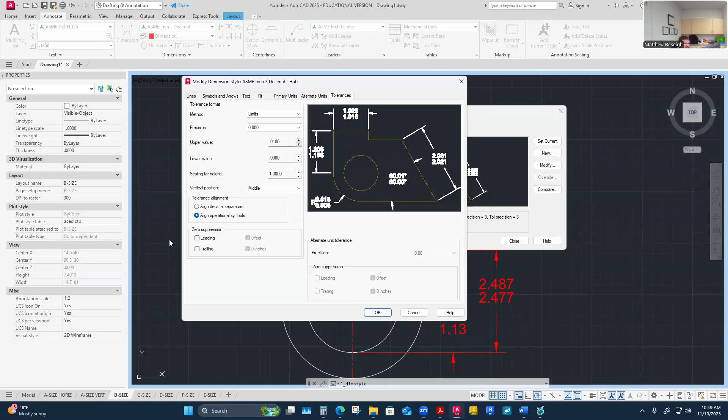Excellent. On the tolerance tab itself, I would suppress the leading zeros. Probably could fix my other style that way too, and I think I probably will. I'll go back into the hub one, into modify, just to make sure if I ever used it for something like this, that I would be suppressing those leading zeros. Okay, close it. And that's better. Now I don't mistake that for a metric dimension. That looks better.

I think I've got the dimensions for this view taken care of, maybe. Just need to do my spacing. And now this is a little bit bigger, so a quarter inch away from here is not going to be sufficient. They're going to overlap. They might work if I went over here, but I think I'm just going to break this rule and put it above, something like this, separated enough that I don't bash into these. This will work. It's breaking that rule, but it's for clarity's sake, and that's key.

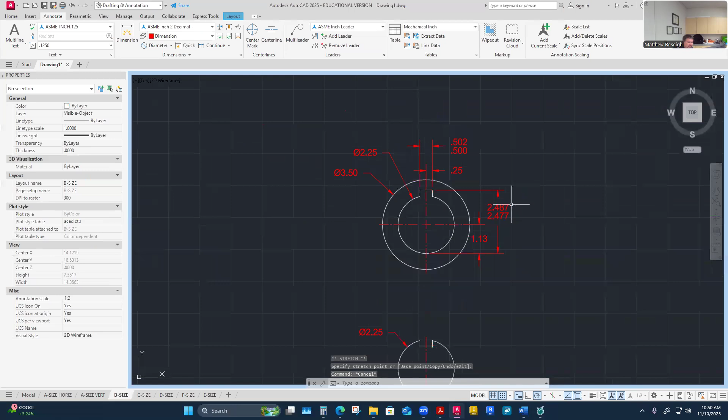So I'll push this one 3/8 of an inch away. And then this one might, but I feel like it will still be too crunched in there. So I'm just going to break that rule and pull it away. I'm going to try to get my lines on the inside. Something like this will work for me. And now I'm ready to finish this one off.

Then we'll be done. I know this has been kind of a long-winded finish. But what ASME wants me to do is, at least it wants me to have this dimension. This is called S on the drawing, right? That one is critical. I'm kind of adding this one as a location dimension.

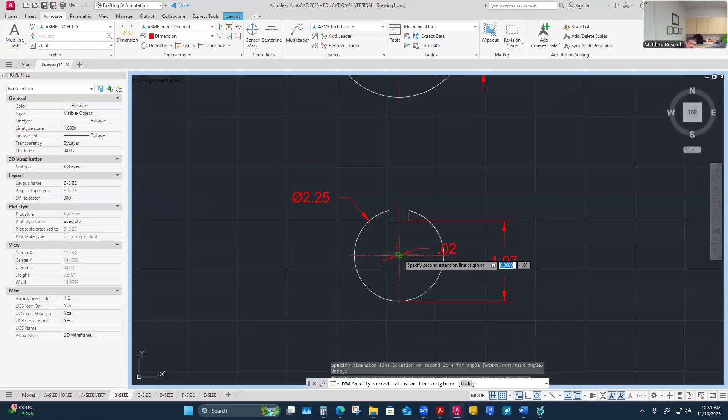Which is probably maybe a bit of an upgrade or update from my other. I'm going to pull this back to the object edge as well. And then I need my widths, so I'll locate those the same way. I need my overall width, and then I'm going to dimension from there. And then just apply these tolerances. They're different though, right? Of course they're different. We couldn't just have them the same.

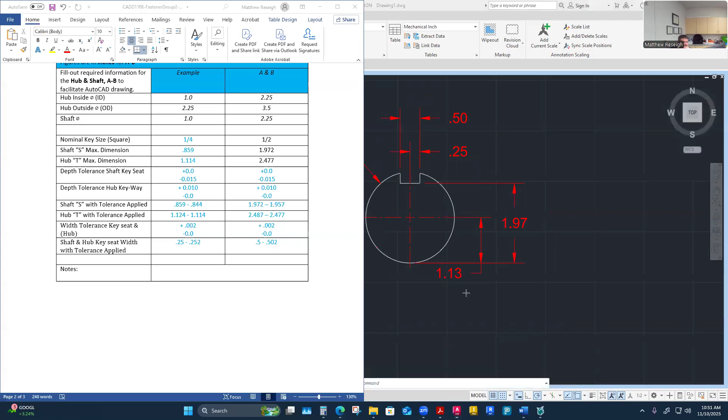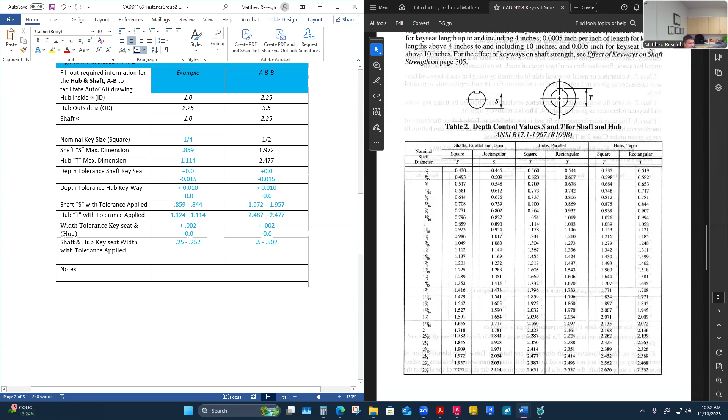I'll look at what that S dimension was. S was on my shaft. The S dimension, that's how I drew it, 1.972, but the S tolerance is going to display like this. So the shaft key seat is this. So it's a tolerance kind of the opposite way. It can be no bigger, but it can be undersized, which would be a deeper cut in the shaft actually, by 15 thousandths. So let's do that.

So I'm going to go back there and make that dimension style. I'm going to go to my dimension styles. I'm going to start with the hub one again and make a new one based off the hub. It's going to be shaft. Let's call it shaft. It's got a different set of tolerances. So I'll say continue. I'm going to pull it out to 3 decimals as well. Let me double check my chart. I think I'm holding this to 3 decimal places. Yep, that makes sense. So keep it 3, say continue.

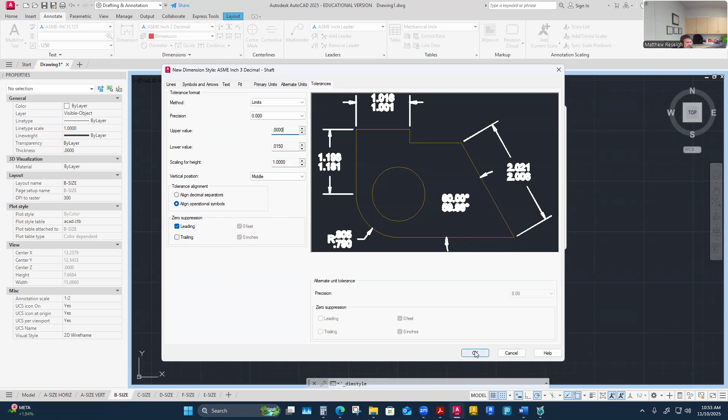The only thing I'm going to change is the tolerancing again. So tolerancing, the upper value just has to be 0. This one can be smaller though by 15 thousandths, right? So I'm just going to change this to be 15 thousandths here. Lower value 15, zero suppression is on for the leading zeros. I'm going to say okay. Close it. I'm not going to set it current, but I'm going to change this one, push it to that dimension style for the shaft.

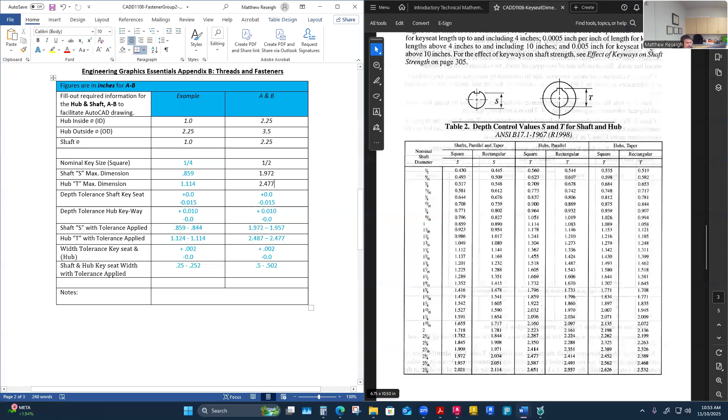This one, I'm going to be allowed to apply the same dimension style. So that's cool. It matched both the upper and lower. So all I have to do is select that one and go for that width, 3 decimal place dimension. And that one's done. That was quicker. Just a little bit of an alignment thing.

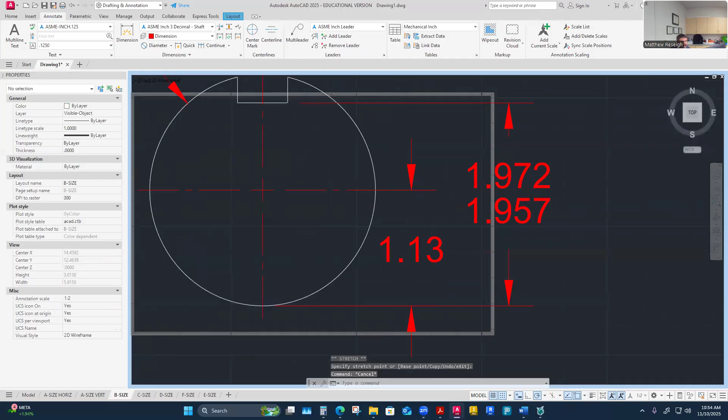And I think that really is the first time we've really applied a tolerance to an actual drawing, right? I think so. I think this is the very first time, which seems like a long ways to be doing tolerances 12 weeks in, but it's true. That's what takes a little while to get there.

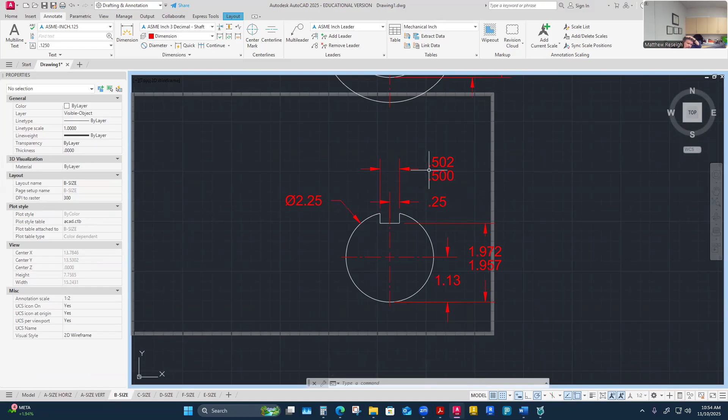I'll leave those. I know they're stacked. That's okay, as long as they're not too close. I wouldn't want to get those any closer, so I'd want to pull them away. I could pull that one over here. You're always looking for clarity, right? Maybe this is more clear. I think that's fantastic. So I'm going to bounce back out here. It's a good start to our drawing. I better save this thing wherever I'm saving that stuff, week 12. Oh, this is week 11 stuff, so I'll save it in week 11.

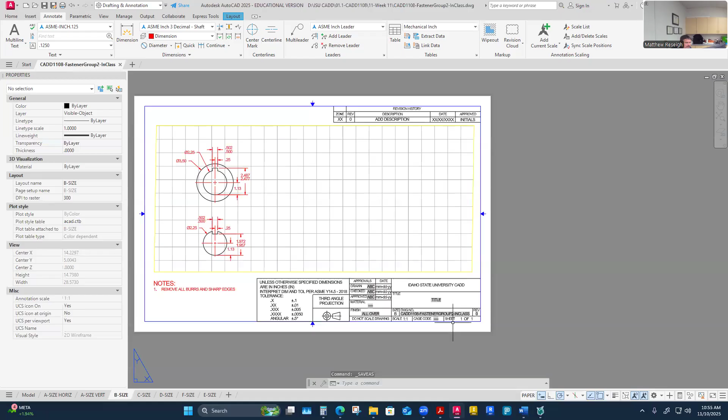That's it, you guys. Tomorrow we'll finish the other two. I know we will, but it might take us a little bit. Maybe we'll barely get into week 12 stuff towards the end of tomorrow, but definitely look for that base mount drawing, see if you got it, and then we'll be ready to jump into the new stuff. We still got some wrap up to do. I like the next drawings though. I like the one that's got an actual assembly with the fastener going into a blind hole. That's a good one. So anyway, let's wrap this up.